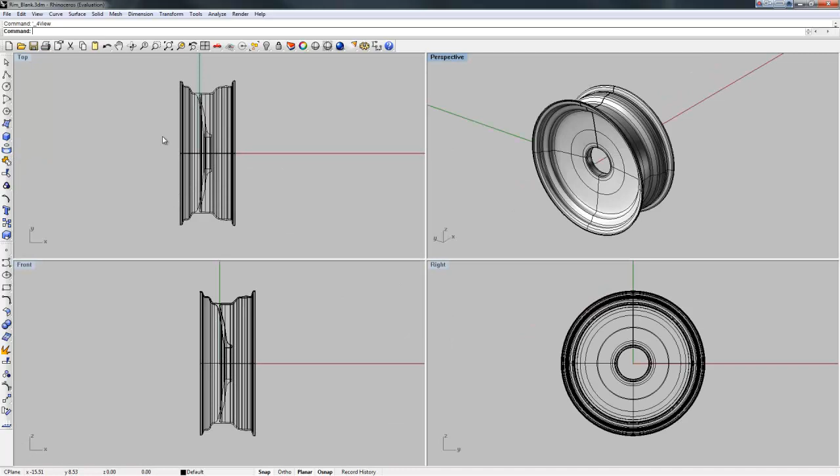Alright, I'm going to go into my right viewport and start with a control point curve.

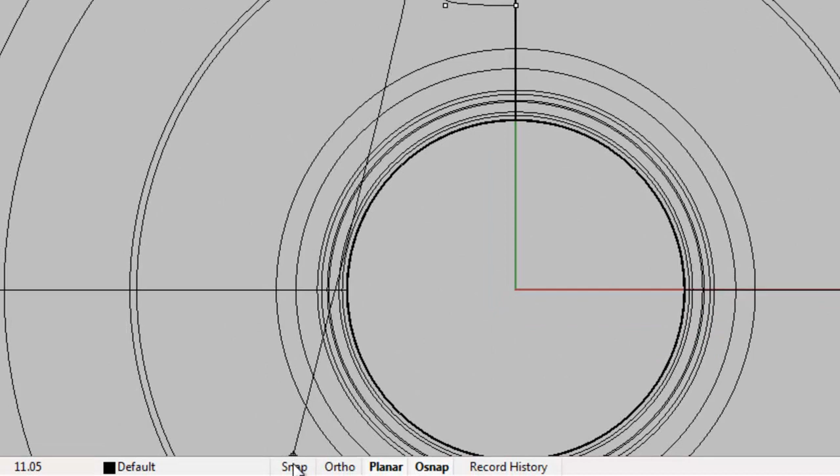I'm just going to create an outline of one side of my slot here, and I'm going to turn snaps on and off. I turned them off so I could get a little more freedom as I'm drawing the control point curve, and then I want to snap right back to the center of this grid, so I turn snaps back on, snap to the center there, and right click to accept that.

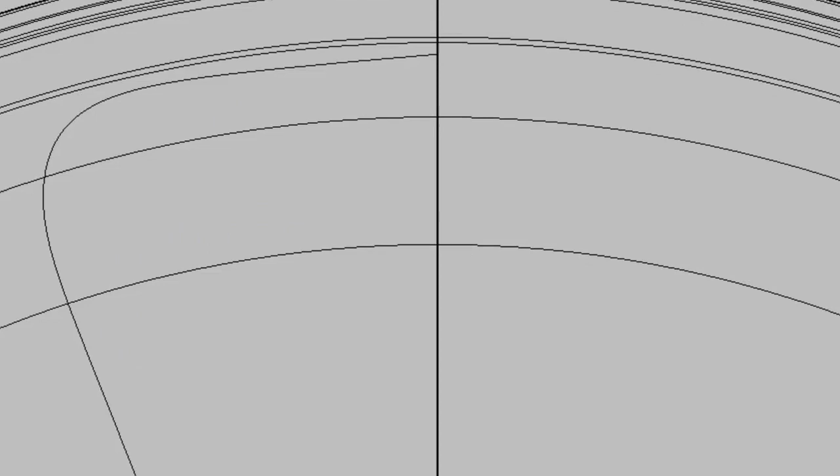Alright, and then I'm going to turn on my control points and go in, let me turn these snaps back off so I can move these points around a little easier.

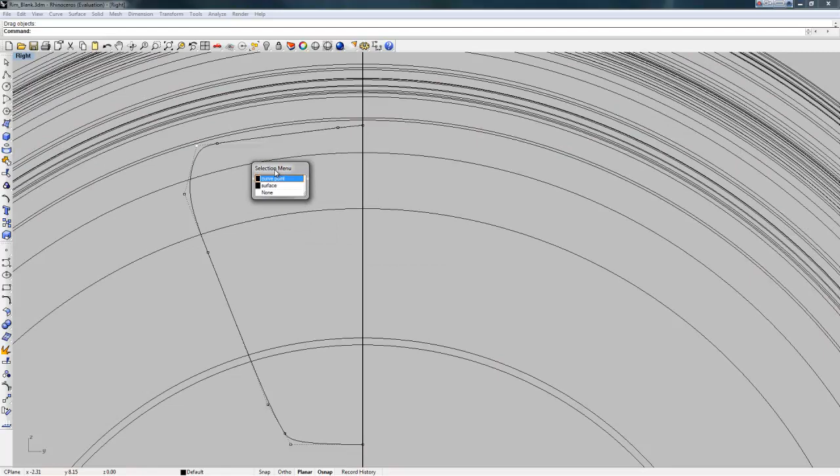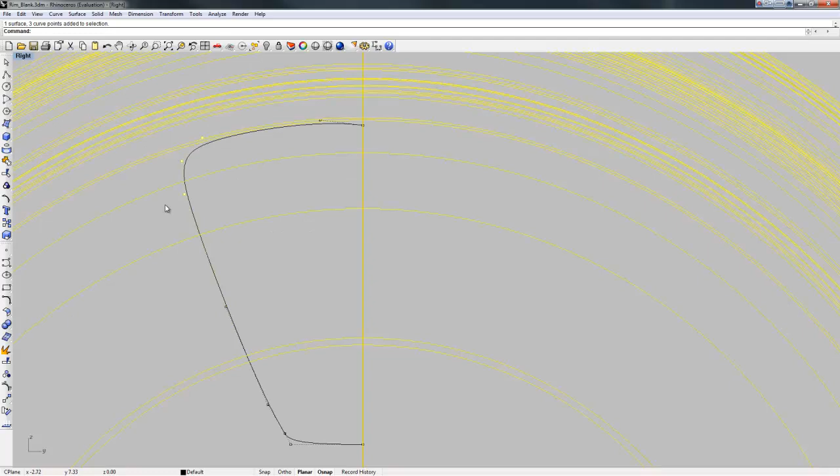This is a pretty neat little feature in Rhino if you haven't noticed. Whenever you select overlapping objects, you get this selection menu asking which object you want to select, the curve point or the surface. So I say I want to select the curve point. It's really unique how it does that, because I don't know of any other software that actually asks you which object you're trying to select, which is kind of neat.

So all I'm doing is just going in and making sure I get everything looking halfway symmetrical, and I'm not really going for hard corners here, so this looks pretty close.

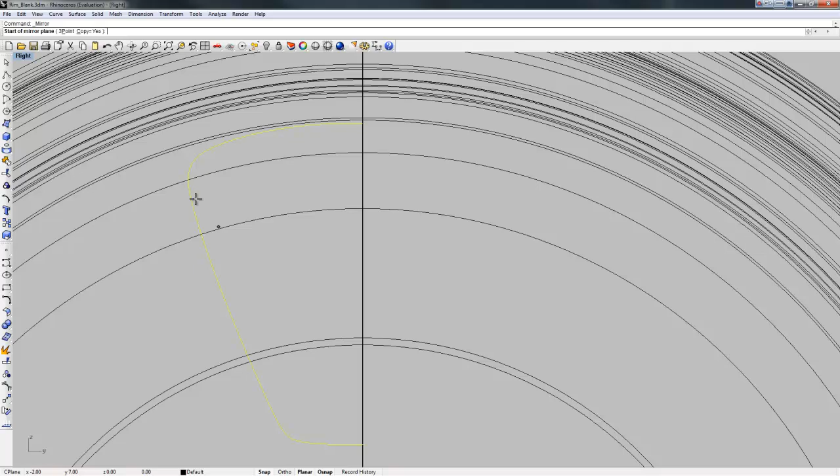Alright, so when I get this one side finished like I want, I hit escape to hide my control points. I select half of my outline and go to transform, mirror, and it's going to ask me for the center of my mirror. Since we want this whole side mirrored over to this side, we want to go right down the center here. I'm just going to select this mirror plane down the center, click, and right click to accept that, and there you go.

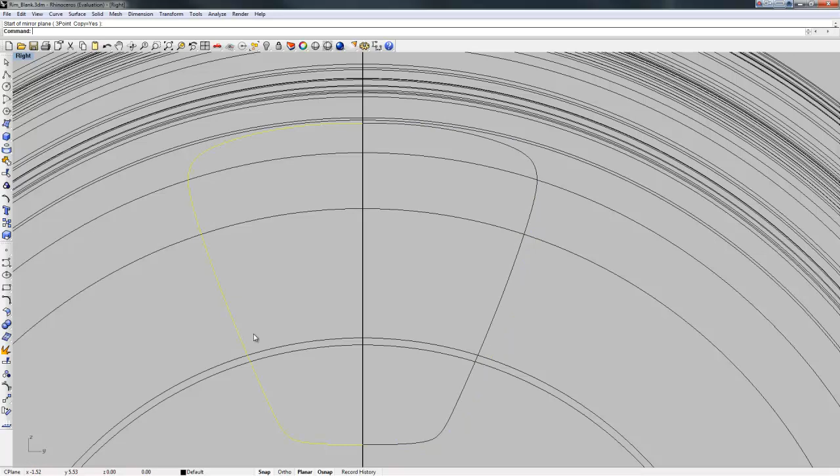So now we have two separate curves, and we want to join them together so we can extrude this. I'm going to select both, select one, hold shift down, select the other one, and come over to join, which will join these two curves together as one curve.

Alright, so now I can take this curve and array it around. I go transform, array, polar, and it's going to ask me for the center of my array, which of course is right here in the center of this grid. Number of items, I want 5, hit enter. Angle to fill or first reference point is 360, enter.

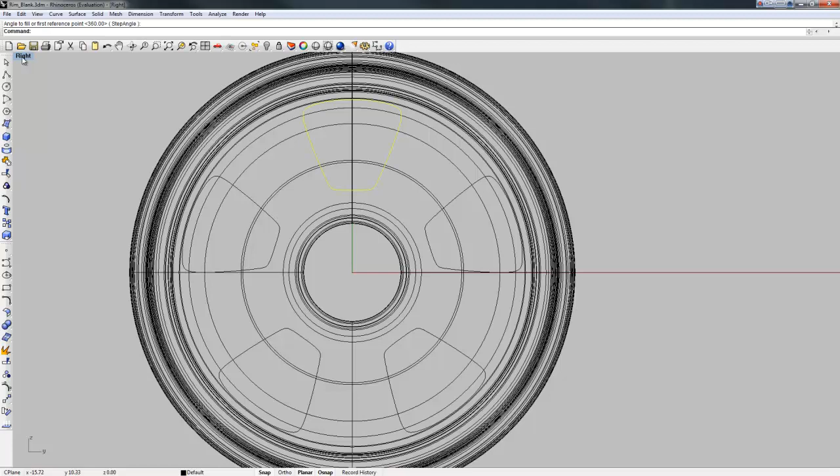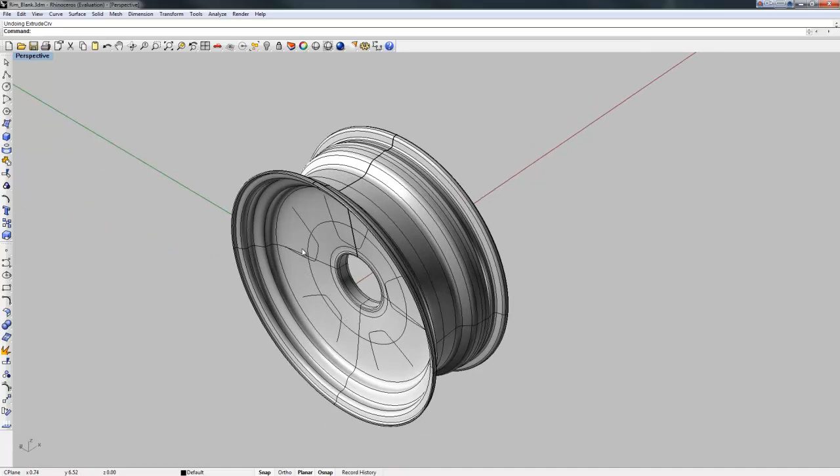And there's my 5 outlines for my holes. Since this curve does not completely extend inside or outside of my surface, some of it's inside, some of it's outside. I want this extrusion to pass completely through both sides of this surface. If I extruded from this side, I wouldn't get the back of this surface. If I extruded from that side, I'd be leaving out the part that's not intersecting. So this would be a good candidate to use a special feature in extrude.

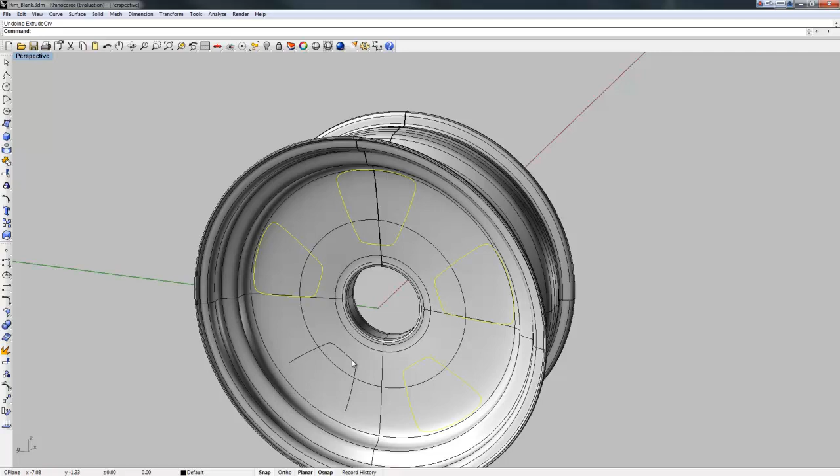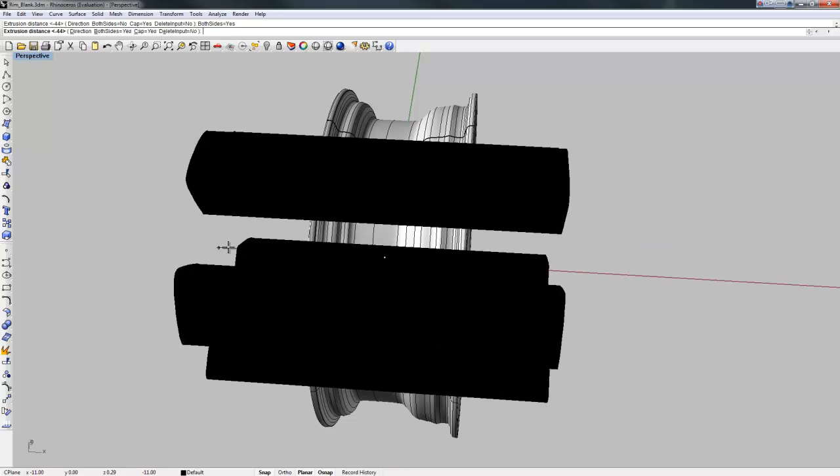This feature allows you to extrude from both ends of the extrude plane. So again, solid extrude planar curve straight. Before I accept this extrusion, I can go up here to both sides and click yes. Now you can see that as I'm pulling the extrusion, I'm getting extrusion on both sides of that curve. This is a really good tool to use, especially if you're doing a boolean like this, to make sure you're passing all the way through both sides of the surface.

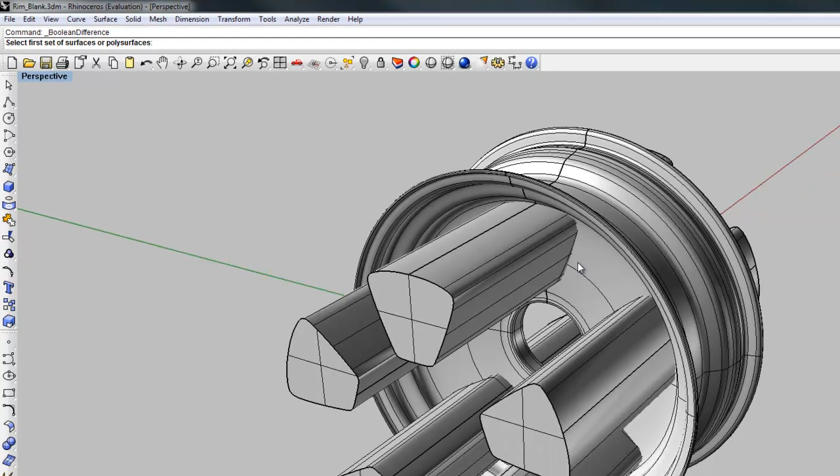So now we're going to use these extrusions to cut out the holes for our mag wheel. I'm going to go solid difference as my boolean type, select my first set of surfaces, which is always the set you want to boolean from, and accept that. Then the second set of surfaces are the surfaces I want to use to boolean or subtract from my first set. So I select these extruded pieces and accept, and it's going to calculate that a little bit.

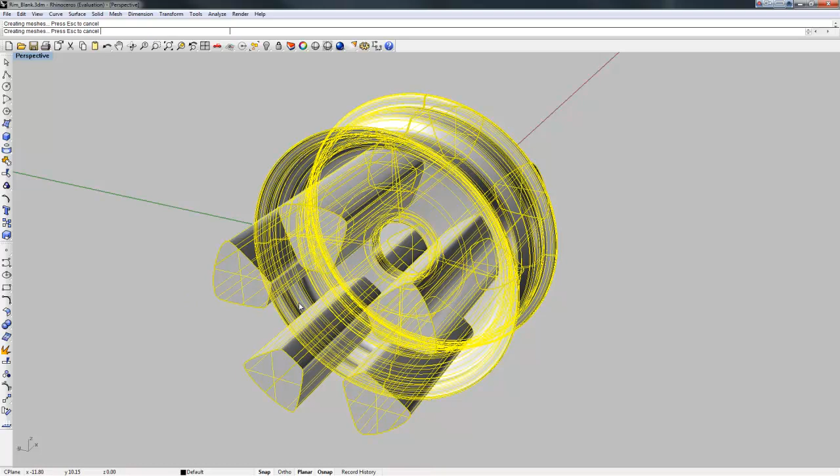And there we go. We got a nice mag wheel here.

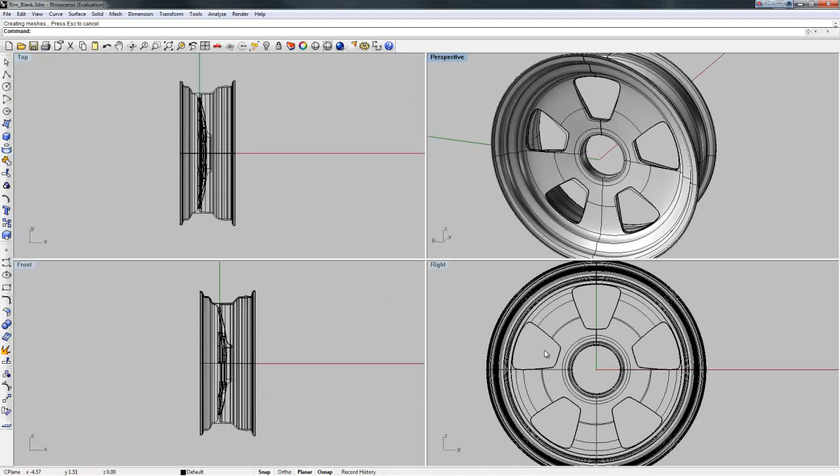So also, if you wanted to go in and do some lug nut holes, we could do that the same exact way. I'll go to the right viewport, draw some circles here, turn off my snaps, and again, if you knew the exact radius of your lug nut holes, you could type them in at this point and get the exact diameter. For now, I'm just going to accept that size.

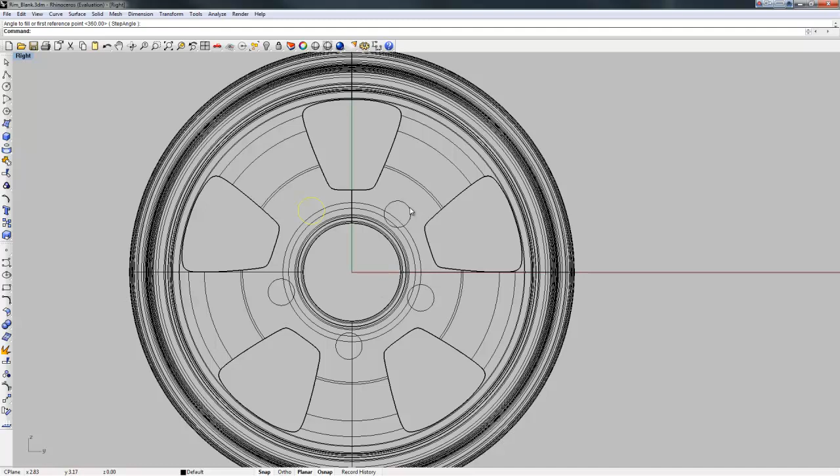And again do an array, polar array, turn my snaps back on, click the center, and I'm going to say 5 of these, accept, and there's my 5 lug nut holes.

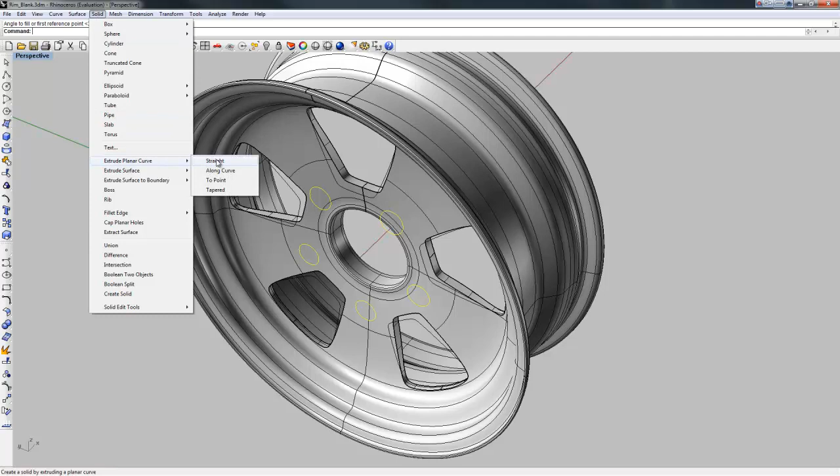So now I can go in and do the same thing here. Since these circles fall completely outside of the intersecting surface, I shouldn't have to extrude both sides of this curve. So go solid extrude planar curve straight, and I'm going to extrude through the back.

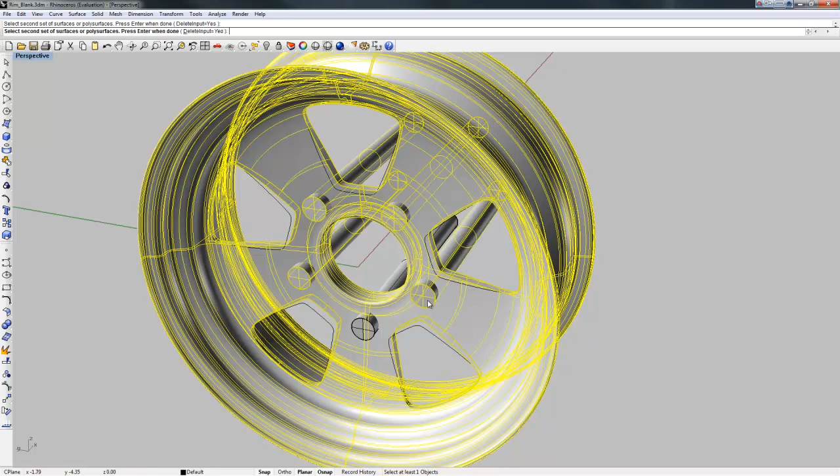There we go. And then again, solid difference, select my rim first, accept that as my first set, then select the extruded circles as my second set, accept that, and then there we go.

So we've got a nice little mag rim, and you can take this and save it in your library of models, so you can always come back and use it.